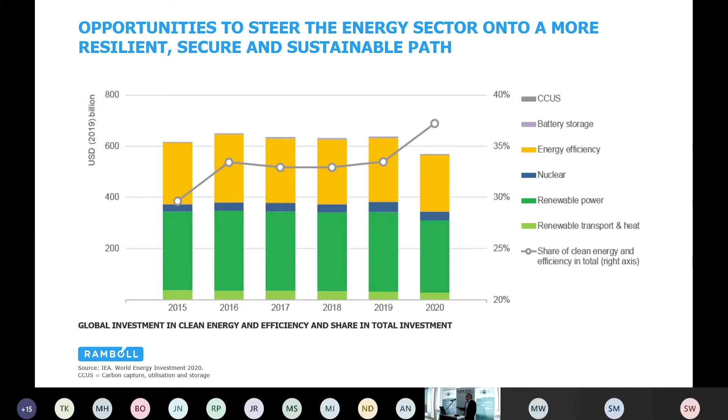And then, of course, the second step: energy is only a small portion. I'm actually sure that energy generation is going to fulfill the targets in Denmark. In Denmark, you know, we set out the 70%. I'm sure that will be reached. It's not cheap, but it can be done. But whenever we are there, remember that the energy part is only a small portion. Then we need to look at industry, removing carbon from that side, and of course, transforming heat and also transforming transport. Those all have to happen to be able to do that.

So the main message is, of course, that it can be done. We truly believe that we have to come out stronger. We talk about the energy island. Energinet does the same thing. But if you look at it, it's all about connecting the European grid in a smarter way.

Whatever is going to be placed on that island, here it looks rather cozy. And you know, you have a beach and a golf course. I'm not sure that that's the place to be in the North Sea. If any of you have been working offshore, then the turbines will not be spinning at any decent gale weather. So that's not going to happen. But what needs to happen is, of course, that we need to enable it.

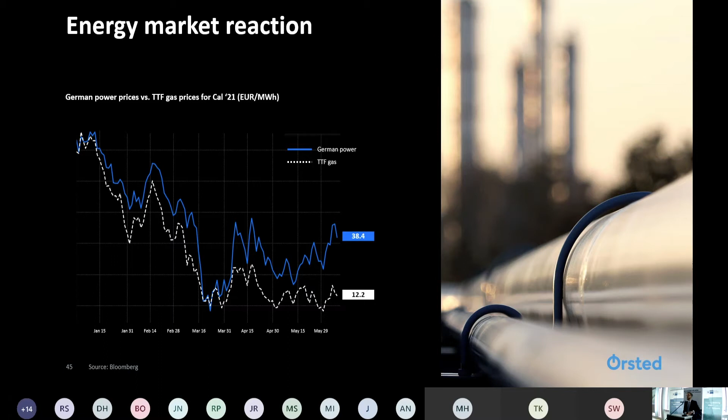But let me just for a second take you into the engine room. Everyone here has had their own challenges around COVID-19. In Ørsted, we've had the same challenge as everyone else with office workers suddenly having to work remote. And we are back here in a room today, and that leads us to forget a little bit that there are many parts of the world where that is not the case. I have an entire UK organization that has been on lockdown since March, and I don't expect them to see the office until September.

This is serious for people. In Denmark, we had the nice version of it. We learned how to use virtual. Everyone works with Teams. It's nice. I actually had, for all of my employees, we could see sick days. I haven't had a sick day. No one's had. So sick days down, productivity up, great.

But it's challenging. George, one of our managers in the UK, has now for 4 months sat at home, and he has another 3 or 4 to go before he can go back to the office. And he sits around a dining table with his wife, who's also trying to video conference in with her work. And around the same dining table sit their 2 teenage daughters who are getting remote education in one room. And that has to happen for 7 months. I mean, this is crazy.

Of course, we have a deep safety culture in Ørsted, and we are concerned about people's mental health in this situation. And that's just for office workers, right? Then we have the challenges around, as I said before, we're a global organization. We have an integrated global supply chain. And we have very highly specialized technicians, spare parts, all of those things. If you suddenly can't move them around because the borders are closed, that's a real challenge again.

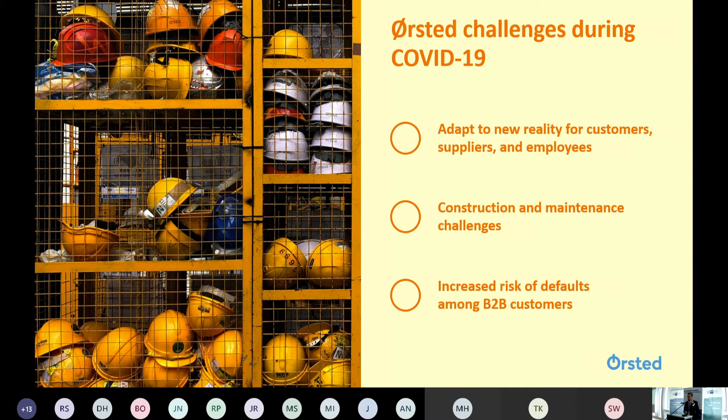So a lot of employees have had to make a lot of personal sacrifices to actually keep working in this. And that's one of the things we're drawing on, a lot of personal sacrifices from our employees, and we're very proud of how they've managed through. So it's been financially challenging for the industry in general, and it's been putting management to a test. But the good thing is that this also happened.

Now, you probably can't read it, but it was in the news, I think it was last week, a week before. The UK hadn't burned coal to provide energy for more than 2 months. It's of course a combination of gas and renewables, but that's phenomenal, right? That's the first time that happens. We've also seen severe stretches of negative prices. We don't like that, but yes, we have a massive challenge ahead of us, but there are silver linings everywhere where we see things starting to happen.

And I put up the logos of what will hopefully in the future be some of my main competitors. Even in this crisis, or I would actually argue potentially because of this crisis and seeing their business models potentially erode in front of them, all of these companies announced net zero targets by 2050. BP did it in February, Shell did it in April, and Total as late as May, which is during the crisis. And in all of this, they still decided, and again, I would argue probably because of it, that they fundamentally have to change.

And this is my second point. It's been bad, but it was probably the shock the industry needed to really be shaken out of complacency and say, okay, we really have to do something. And if these guys join us on this journey, it'll be hard for us, but it's going to be the right thing for the world, because we're going to see the capital cost go down with all of the knowledge that these guys bring in.

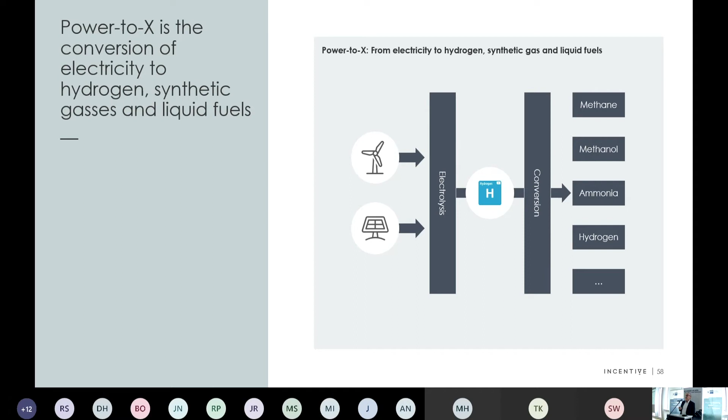This is maybe difficult to read, but in reality, the IEA did a very, very good study in 2019, where they tried to evaluate how many of the current energy uses we can substitute with hydrogen or hydrogen-based fuels, and the answer was almost all of it. It's just a matter of the cost of first producing hydrogen and then converting it to the other fuels.

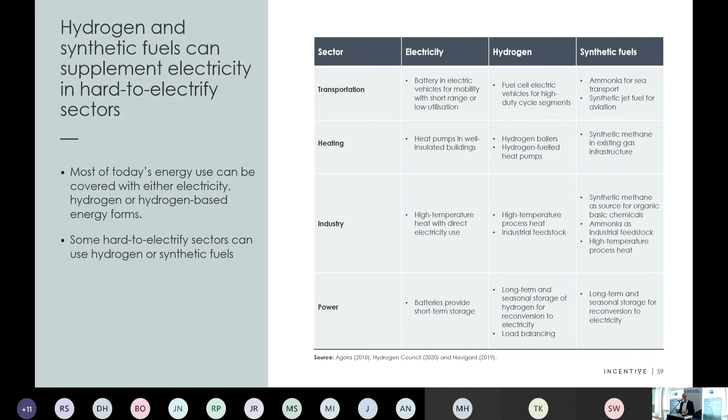And the good thing about this is, if you think about it, okay, we want to replace all the fossil fuels. With what? What are the alternatives? Yeah, biomethane, or in Denmark we like biogas. We may even think we invented biogas. We haven't, okay? And the thing about biogas is it requires feedstock. And unless, instead of growing food, we want to start to grow energy crops for biogas, there's not enough potential in biogas to drive the green transition. If you ask the IEA, biogas has in reality no role in the green transition. It'll be a small local thing.

I think Stine is promoting some things that I think are very, very smart, where in Denmark we have the feedstock, it's agricultural waste. So in reality, it's something that will turn into CO2 anyway. But if you combine this with hydrogen, we can actually make a business out of it. I think that's a good idea. But I also think that's a local solution that in reality does not have potential to be big scale in Europe.

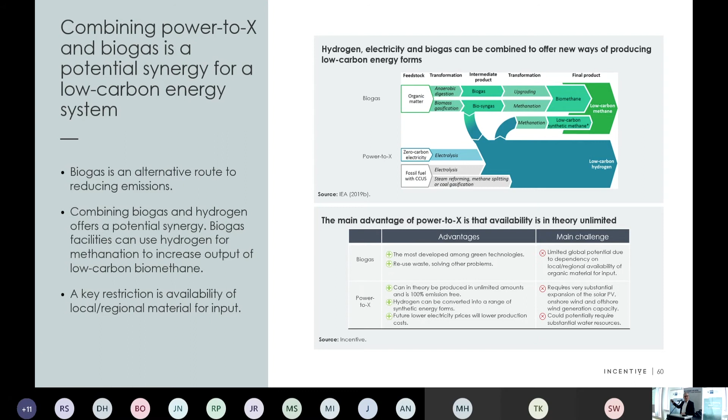Now, I like Power-to-X, and I think it's a great idea. I also think that Ørsted's plan for building a 1.3 gigawatt electrolyzer is a good idea. The only thing is that's not what they're doing, right? They're building a 10 megawatt electrolyzer. Then there are plans in the next 10 years to build 1.3 gigawatt. But I think, and maybe I forget to say this later, somebody needs to decide today or tomorrow or the day after tomorrow to build a 1 gigawatt electrolyzer, so we can see what we can drive the cost down to.

Now, what does it take to build Power-to-X? The challenge with Power-to-X is that it does not exist. There is nothing, right? There is no consumption of hydrogen. Nobody uses hydrogen, or the chemical industry uses hydrogen. Maybe even steel production uses hydrogen. In reality, nobody uses hydrogen because it's more expensive as an energy fuel than gas. Is anybody producing hydrogen electrolyzers? Nobody is producing hydrogen electrolyzers. So it doesn't exist. Does anybody have any pipelines where you can transport hydrogen? Nobody, right? So this in reality is a start from scratch.

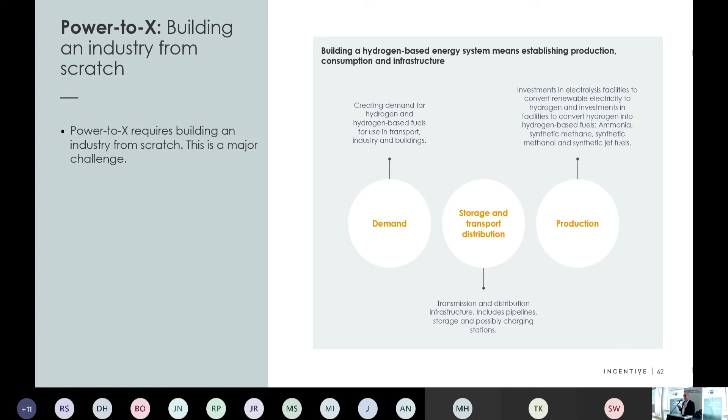Now, the good thing about this, we've done it before. I'm so old, I remember when we built the natural gas system in Denmark. We decided, okay, we want to replace coal and oil with natural gas. So we found somebody who could produce natural gas. We found some consumers that could use natural gas, and we built the natural gas grid. So we've done this before. So I think this is a challenge where we have to build all the things at the same time. Not an easy thing to do. Doing 3 things at the same time is not simple, right?

This also just to show you the cost of hydrogen. Why does nobody use it? It's 5 times more expensive than the alternative. So we have to drive down the cost of hydrogen. That's why the 1 gigawatt electrolyzer is a need. What we could do in the short run, of course: how did we get offshore wind going? Well, we started subsidizing it. So one recommendation could be, why don't we subsidize use of hydrogen instead of using fossil alternatives? Simple way of doing it.

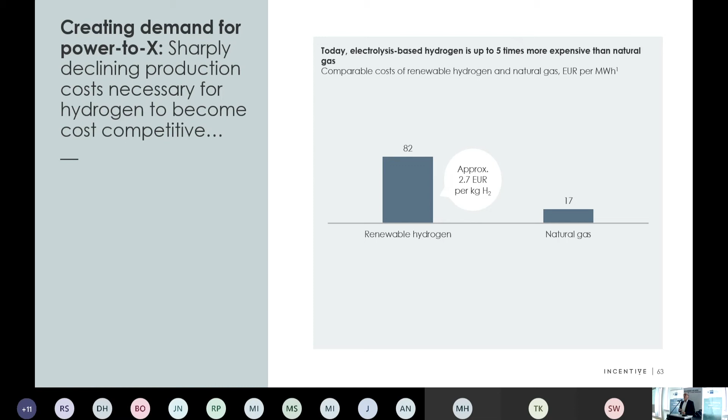I have another little idea for how we do it. And this may be the same. Why don't we then just start blending it? When we did this, it reminded me of one thing that I'd forgotten. There is still in Denmark a requirement to blend bioethanol into petrol. 15 years ago, we thought that today the cars would run on ethanol. So we had a requirement to blend ethanol into petrol. I think we should do the same with hydrogen in the natural gas.

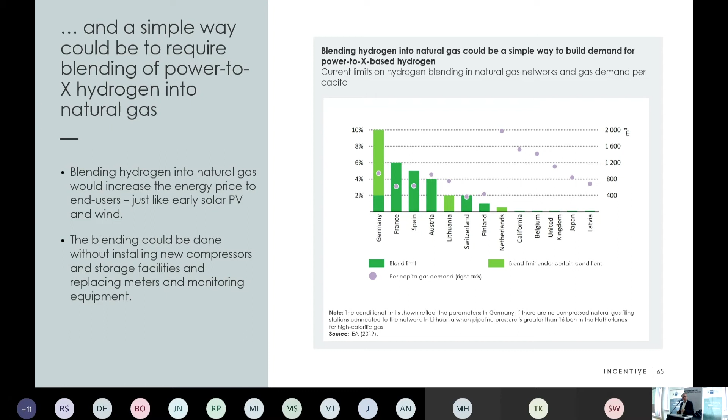On supply, well, we need to start building this. I also understand why Ørsted is building a 10 megawatt electrolyzer. The largest ones today are 20 megawatt. So it's still more or less at the experimental stage. I think we need to have some learnings, and then we can start building larger ones. In the meanwhile, what can we do? I think that was Michael's point. We need a simpler way of doing this. Let's do carbon capture.

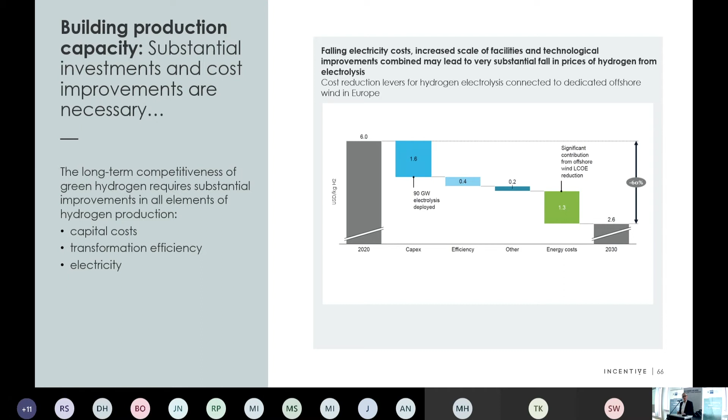Producing hydrogen is not new technology. We've known that for many years, that we do it from gas, steam methane reforming. Let's just capture the carbon, and then we have a hydrogen source. I think this is a simple way. So that's one way of getting the demand going and get the supply going.

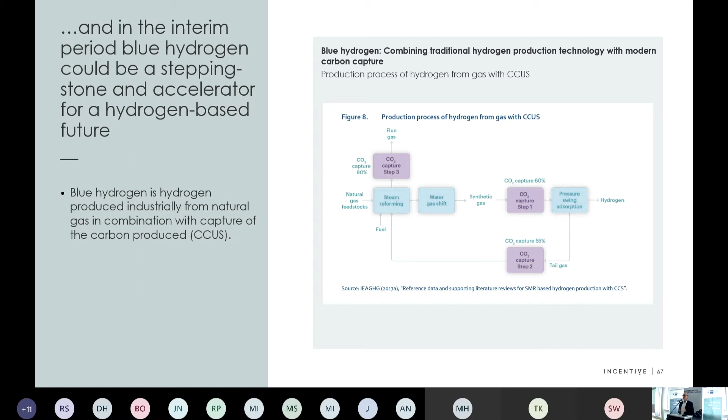The final piece in the puzzle is infrastructure. The good news on that is we actually have something on the infrastructure. We have the natural gas grid. And if you read the different studies, some are for, some are against natural gas grids. I think natural gas grids is a very good idea.

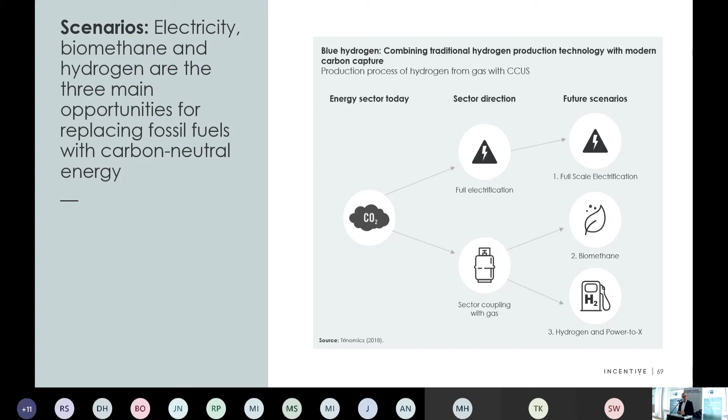Most of the big studies that say, well, how can we transform the whole EU energy system to something that's renewable? They look at some different scenarios. And typically it's either we go electric, we go gas, or we go hydrogen. I'll show you the electric. This is going all electric. So this is a study where they try to see what will happen to the consumption of hydrogen and biogas if we go electric. And the thing is, well, we still need a lot of gas and hydrogen. And why is that the case? That's because you need to transport electricity.

And Michael is right that it's a challenge to go from electricity to hydrogen and then back to electricity. But at least it's well-known technologies. It's doable. And if electricity is cheap, it may also be a cheap solution to this. I've been in the electricity sector for many years. I know how difficult it is to get high voltage lines down through Germany. We've been asking for that for 20 years. It doesn't happen. Maybe one way of doing this is reusing the gas infrastructure to transport electricity in reality. So we need the gas infrastructure long-term also. So that's a takeaway: maintain and develop the gas infrastructure.

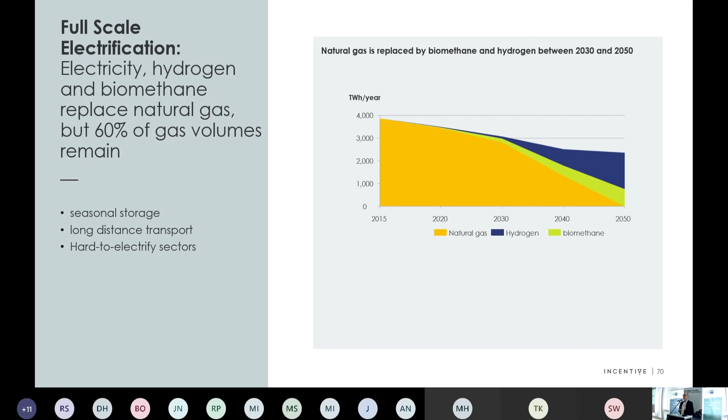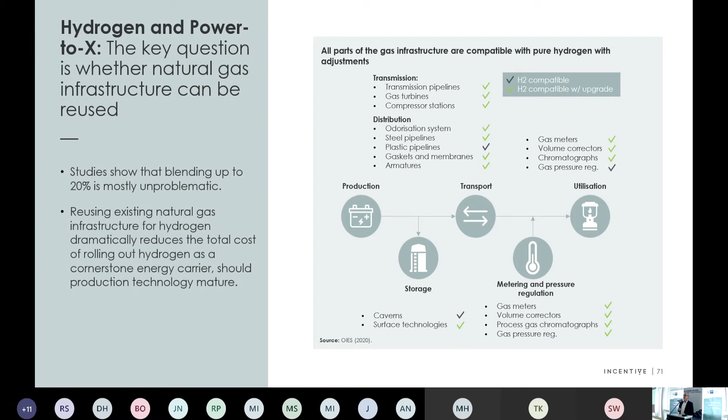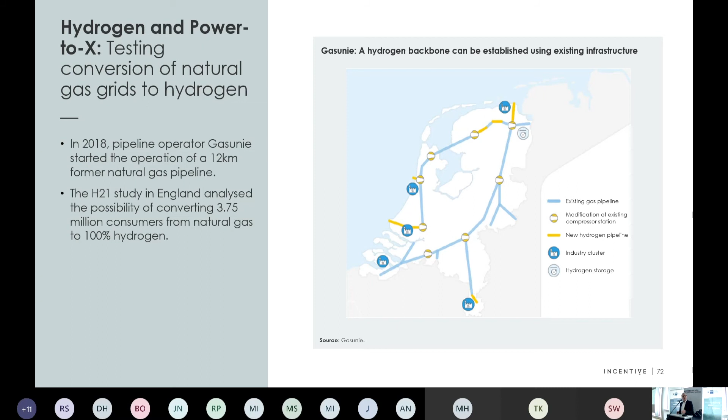Coming to my final point, so we need the gas grid long term, but my point is we also need the gas short term. In Europe, we may think that the world is running on wind turbines. It's not. In reality, the electricity sector is running on coal. It needs to stop running on coal. Most of the countries in Europe have plans to phase out coal. I think maybe the best way of getting rid of coal is let the market get rid of coal.

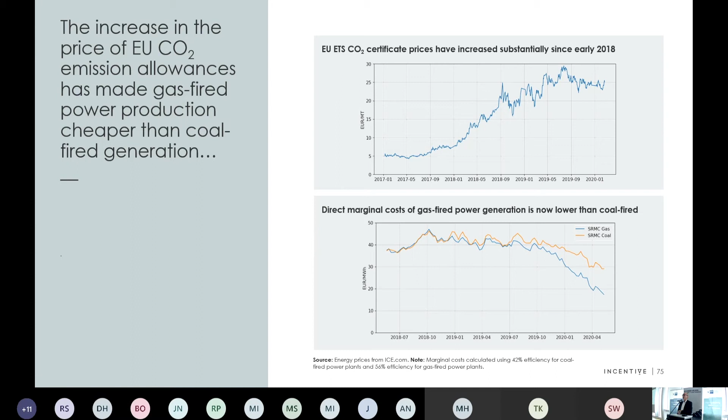So just summing up, it's not going to be easy. I think it's going to be pretty goddamn difficult to meet the Paris Agreement. I also think that power to X is part of the solution, and maybe even, in my opinion, the only solution we can see right now. And then make sure we maintain and use the gas infrastructure to support the transition.

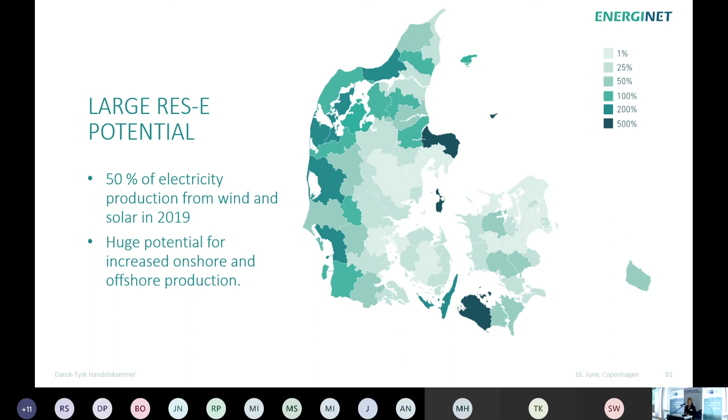So in a Danish context, it's relevant to discuss what's actually to be done with this additional electricity and what kind of value it can actually create. On the gas side, you can start with biogas that comes from a limited resource. And we also have a huge extension, and I didn't put all the new biogas facilities on this map because at the moment new ones are coming online every month. It goes very fast as well, and they are also located in areas.

It's mainly in the western part of Denmark, and we are currently investing a lot in transporting biogas from these parts of the grid, from decentral production of gas, and then the other way. For those of you who know the natural gas grid, we are only used to taking it from the North Sea or from Germany and then pushing it to the consumer. And now we have to handle it the opposite way. And that actually causes a lot of investments at the moment.

But in my opinion, green gas is not only biogas and it's not only methane. Gaseous forms of energy are actually a lot of different forms. We have a lot of knowledge, of course, from handling methane, but we also have to think about how to utilize that on other gases. It could, of course, be hydrogen, as we spoke about. But when we talk about CCS, for example, we also have to discuss transport of CO2, which could be transported as a gas in the same way. So that's some of the areas we're looking into.

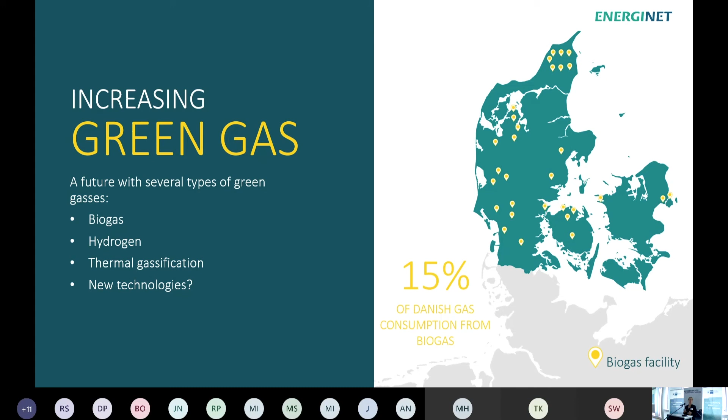When we're discussing the resources we have available and how we use them well, we of course also take, as was said before, the discussion on how to supply energy for the sectors where electricity is not directly easy to use. And that actually constitutes, as Torben mentioned, a large part of the total energy consumption in the world. And it's a good idea to look into how to solve it. This figure illustrates how large a part can actually be electrified. That's a small mark in the circle. So it's actually not a large potential. So there's still a lot to handle in another way.

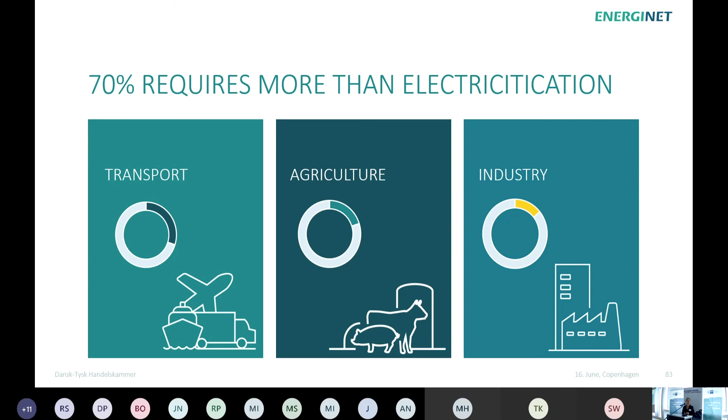Then approximately more than 1 year ago, we handed out a report saying that we think using hydrogen as feedstock for other fuels could be relevant before 2030. I had a phone call from a journalist saying, what are you geeks doing now? Do you think this is a good idea? What are you using the consumer's money for to do a report like this? But actually you all said in the previous

presentations that the costs we see at the moment on renewables are going down very fast, and I don't think we are at the level we will see yet. Also, I think a lot of people thought that biogas would be high for a very long time. That's dropping as well. I mentioned electrolyzers, prices on hydrogen. The report done by the IEA just last year stated a price in 2030. We now saw the first contracts actually stating prices at that level. We can discuss how valid these single contracts are, but we actually do see prices going down in this area very fast as well.

And one thing I like to do is look around the markets, follow the money, who is investing in what. And this hydrogen area is getting a lot of funding, not only in Europe, not only by green companies. Now some of the oil companies and gas companies are going into the same. But you also see the same kind of activity in China, for example, and they are putting a lot of money in this as well. So I think we have to look at it.

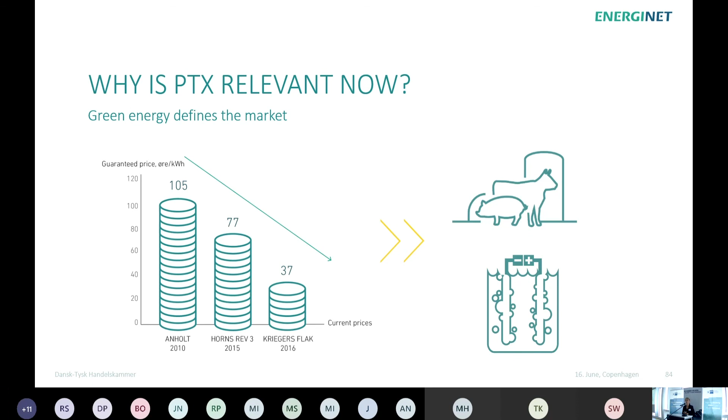We have done some investigations on the Danish case, on what's actually the potential for using hydrogen in other areas. It can be used, of course, directly where you have hydrogen today, but that's not in energy, that's in chemicals or other processes, like, for example, refining at refineries. There it's more direct to start, but it could also be the production of ammonia for agriculture. They need it for fertilizing the fields, so that's also a way to use renewable electricity for a commodity that has previously been produced from natural gas, for example.

If we look into some of these different potentials, if we take the first step, it's a doubling of the current electricity demand in Denmark. And if we look into the higher potentials, we actually talk about quadrupling electricity consumption, and that's a huge amount of electricity. And of course, it is available.

And then comes the question that some of you had before: where does the CO2 come from? At the moment, we actually see a lot of the resources coming from biomass. That's important for these different types of commodities that can be produced, and we do see the potential for that in Denmark. In the beginning, we can also use it from fossil fuels, but that's not a valid way to go in the long term.

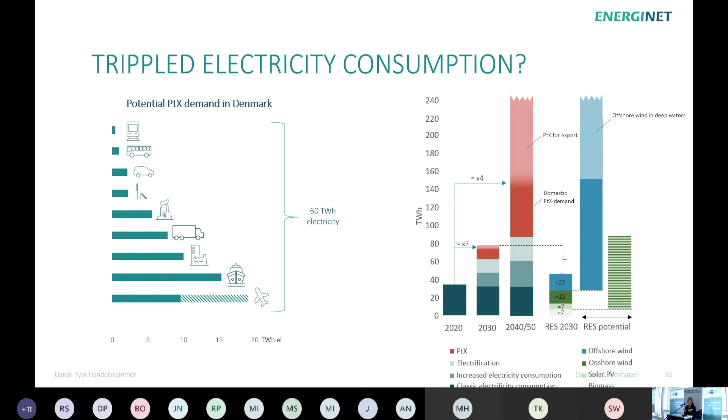Jumping into the infrastructure part. When you get this new way of talking about power to X and hydrogen and a lot of other things, it gets a bit more difficult when you go into the detail of how you actually construct the different facilities and what's actually needed. You saw on Torben's slides that you have a lot of different feedstocks for producing the different types of fuels. You have electricity, you have hydrogen, you can have CO2 depending on what product you want to produce, but they are not all located in the same place.

And no matter how we do it and where we place it, we need to transport something. It can be electricity, but I know from our experience it's not easy to build overhead lines. We looked a bit scared at this project in Copenhagen because I saw overhead lines coming in from wherever and going through Copenhagen, with maybe 2 lines of 400 kV. And I know what difficulties we had in Jutland building 1 line. So that could be a huge difficulty for the project.

It's not easy to build gas infrastructure either. We are right now in the process of constructing Baltic Pipe, and it's not easy either. But we have to take the discussions. In Energinet, we have 2 focus areas on this: the electricity part, and gas. And I really don't care if it's methane, CO2, hydrogen, whatever. We just have to make sure that the right infrastructure is there for what's actually needed to create value from the renewables. That's where we try to look into our way of working.

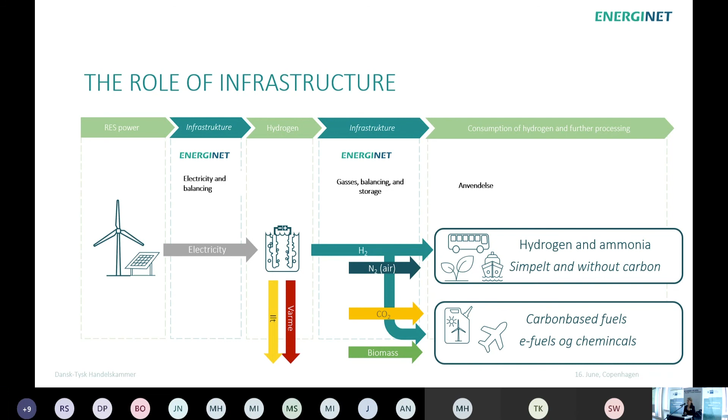That's because we think that we already now have to take into consideration whether or not we should do international markets on hydrogen as well. It is, of course, a trade-off between the cost of different types of infrastructures and the value they create. But I do think that we have to take that discussion into mind.

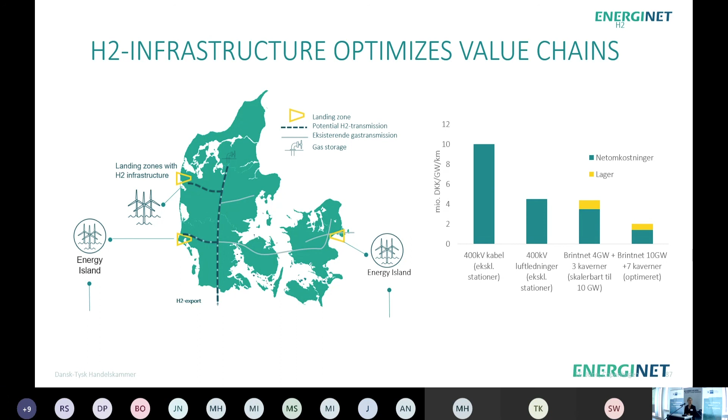Then this was mentioned, hydrogen from Morocco. Hydrogen from renewables, you can produce that, and it's a proven technology. We are lacking upscaling, but it's not just creating value in itself. It has to compete with other types of hydrogen. It could be what's called blue hydrogen from Russia. They are looking into technologies to take CO2 out of natural gas and then export hydrogen to Europe.

It could also be renewable produced hydrogen from Morocco that comes up from the south through Italy and Spain, and there are actually projects on that. The German project is also talking about importing hydrogen from Northern Africa. From our point of view, there are cost components that are important. I think the pure hydrogen price is cheaper in Africa compared to hydrogen from, for example, offshore wind in the North Sea. But then we have to transport it.

And we also have to look at the production patterns when we look into a facility like this. If you produce only on solar power, you have a certain number of hours of production, and that's another figure when you talk about offshore wind.

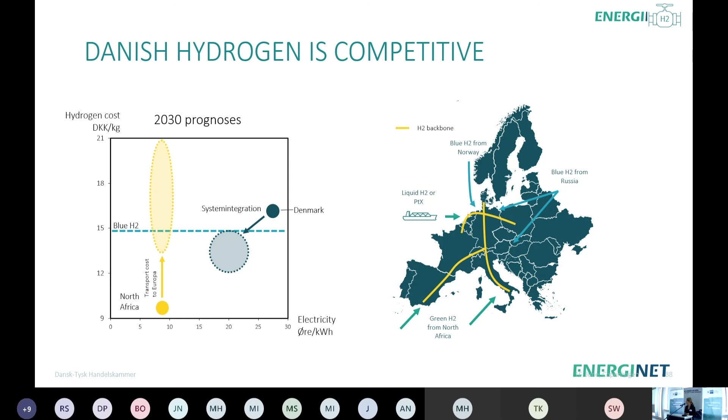But if you are in an energy system that has a global market and can use other types of electricity at the same time, then it can actually drive down costs in the Northern European region as well. And that's a part of our discussions as well. So just to finish off, I don't see one road ahead on this. I don't come here today and say I see the gas infrastructure look this and this way.

I have some part of the business working on methane. I think that's important, at least also for Danish industry. It's also important for our Polish colleagues, where we make a contract for at least 2038. But we work on blending. We work on hydrogen infrastructure.

We also work on CO2 infrastructure, because I don't want to be the one to blame if we are too late or we don't facilitate the right type of infrastructure or know the right things about the technical features of the different ways to go. So I hope that we can take some jumps in that direction. I'm confident we can do it together.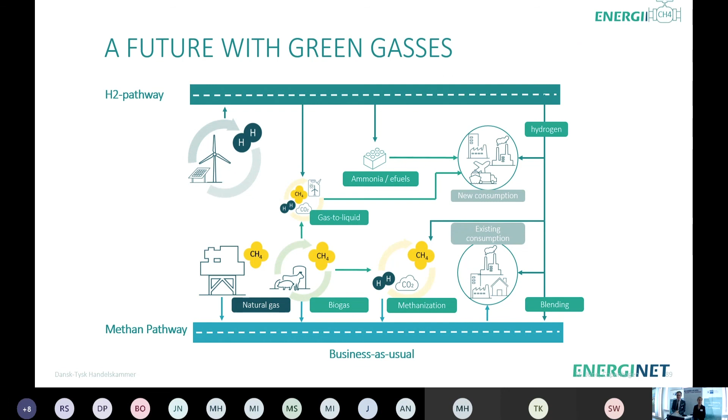Thank you, Stine, for presenting your grid. You also managed to stay under those 20 minutes, and I think we can take one more question for you, from participants here or from online.

A quite long question. Do you believe that Denmark will be in the position to become self-sufficient in energy supply, or will a strong interconnection to neighboring countries still be necessary for security of supply? If interconnections would be needed, what countries will be important? So the question was about self-sufficiency and about the interconnection. Security of supply and infrastructure.

What I just presented on different ways, one of the very important parts of actually being able to be competitive with these green solutions is flexibility. Flexibility, and not only day-to-day, but also long-term, for example, on storage facilities. And the easiest way to handle that and the cheapest way is to use collaboration with your neighbors. So I don't think we'll see less. I think we'll see more.

I talked about doubling and quadrupling the electricity production, but I actually think that we should keep the infrastructure low on that. Let's say if it's 4 times on consumption, let's hope that infrastructure is 2 times, something like that. But it will be something that continues to be important also to keep down volatility and the interest in investing in Denmark. So I think that, adding the numbers together on average, we can be self-sufficient, but only if we keep the borders open on all energy forms.